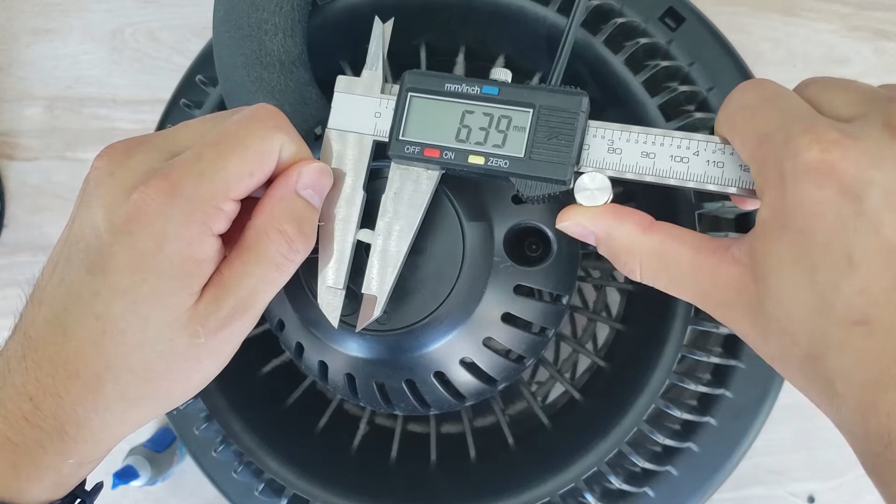So I took some dimensions with my trusty calipers. This diameter was about 6.5. And then there's this little flat cutout section that was about 4, and that's how it actually turns. Now this wobbles quite a bit, so it's a little unreliable, so I just took the best dimensions I could, and it turned out to be about 14 millimeters in length. I rounded up.

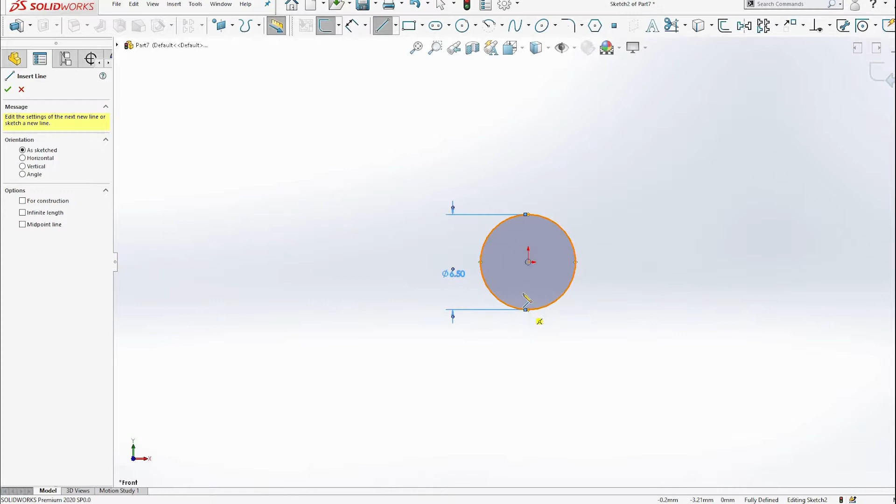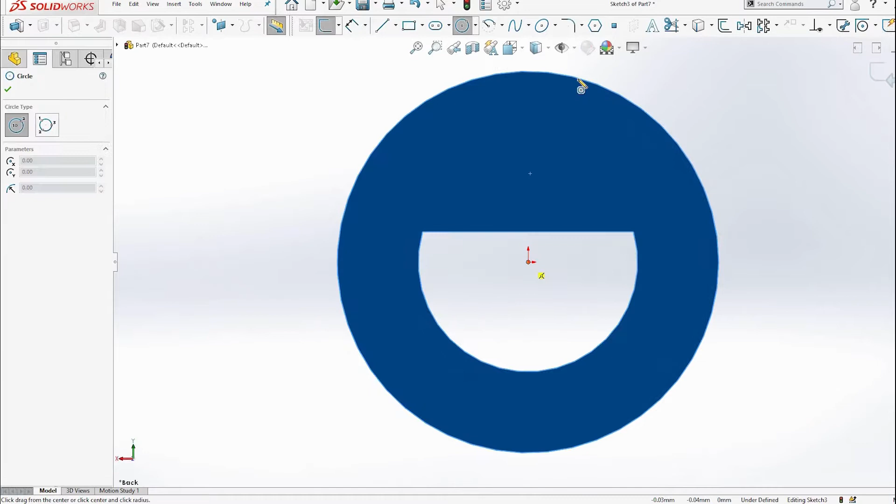Alright, so first I kind of remodeled the peg thing based on those dimensions. Then I did a little bit of an offset just so it wouldn't be too tight of a fit. And then I added a circle just around it. I set it to like 12 millimeters, that's pretty good, and extruded it to 14. So that was the length. I added a little bit more on the back end just so there'd be more to grab onto. And then from there I just slowly started building up from it.

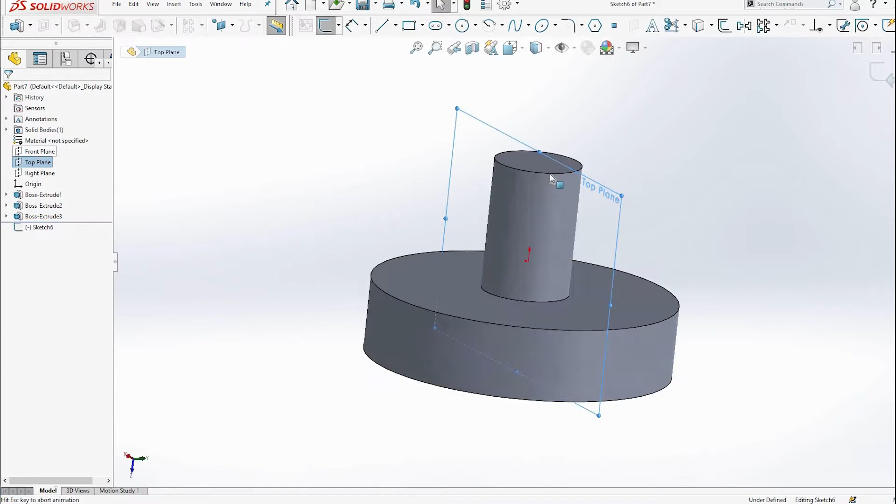Once I had the basic shape down, I wanted to add kind of a rounded top to it. So I was playing around with some heights, trying to figure out what the best depth was. And I was running into a little bit of an issue because it wasn't quite lining up. So I was trying to make it tangent with that side line and that top line.

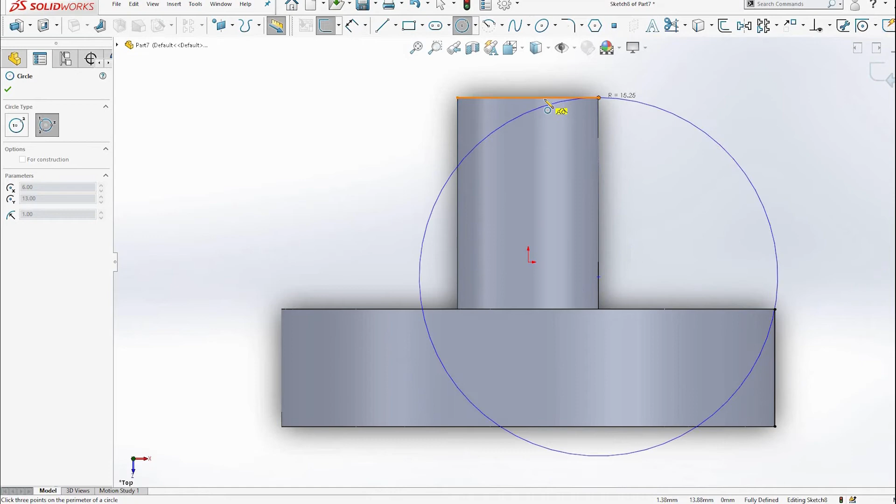In the end, it was giving me more trouble than it was worth, so I decided to cheat a little bit and cut off just a tiny section right there. Now it's nice and round and seemed to be perfectly fitting. Once I was happy with the shape, I decided to revolve it around the center. Now it has a nice dome to it.

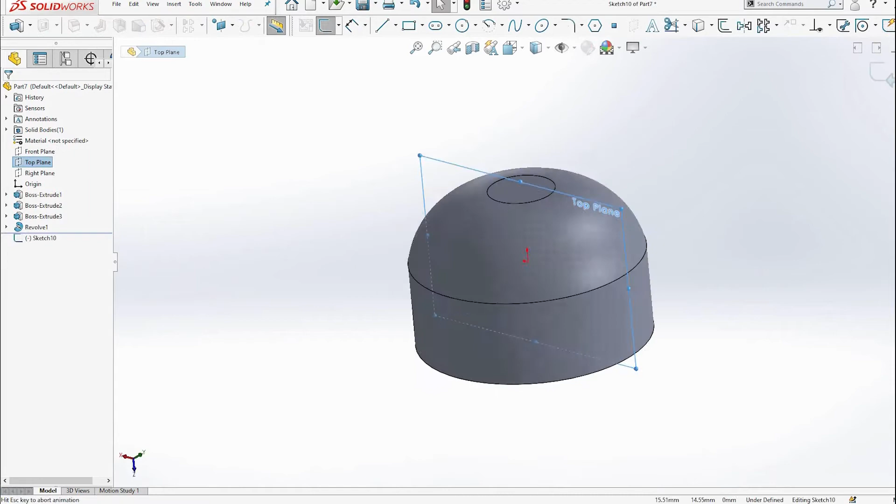It was looking pretty good, but domes are kind of hard to grab onto, so I decided to try and cut into it a little bit. I was being a little creative with this, just trying to see what was most ergonomic, and effectively what I did was I outlined the sides, and then I do a little cutaway, something called a swept cut. And so what that does is it traces a circle around that line and cuts it out.

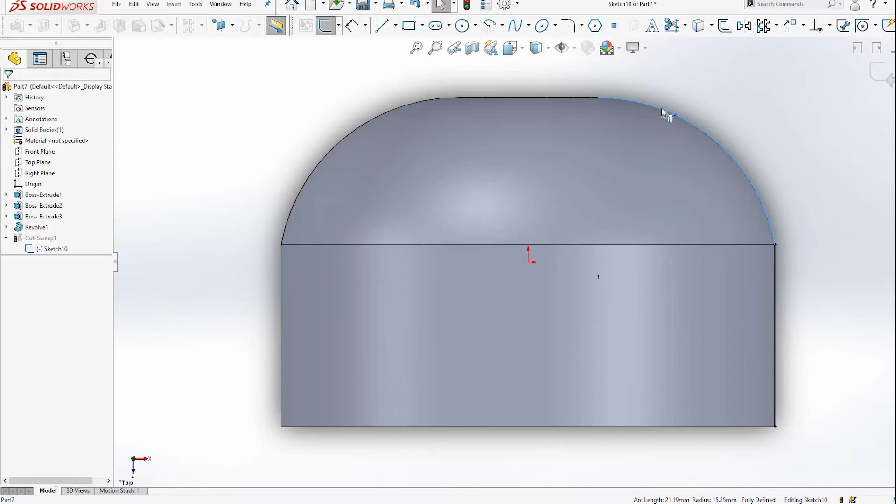Now this doesn't look very ergonomic right now, so I extended it up a little bit higher, changed the diameter so it was a little smaller, and from there we can work with it. Now this top section was flat, which I wasn't a fan of, so there's a couple different ways you can round it out. I decided to just do another revolve cut and just cut out a sphere. This bottom section doesn't really matter because it's going to be flat against the fan, so that looked pretty good to me at first.

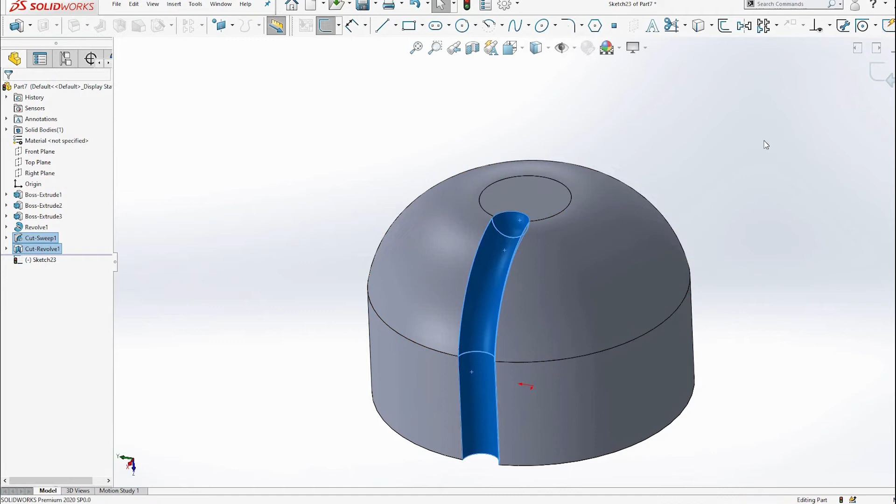So I decided to kind of replicate it in a circular pattern, give it some grooves, and then round it out. But I ended up making something like a Coke bottle or a bell pepper.

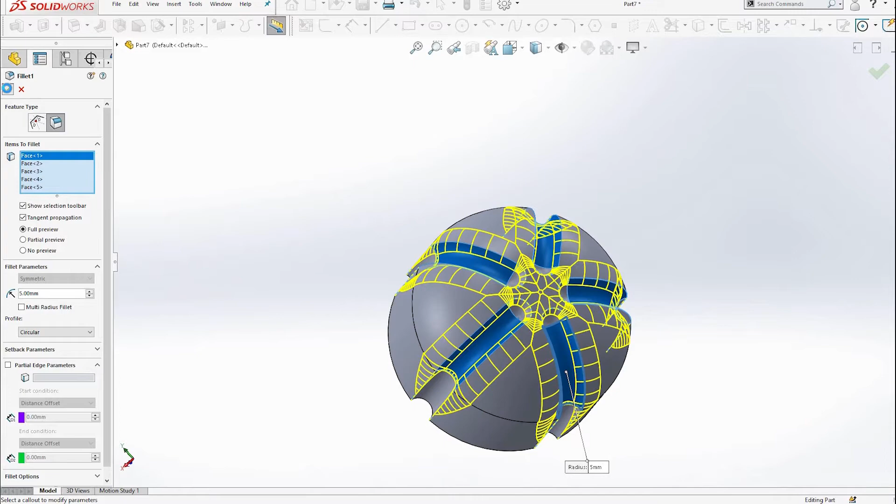I tried rounding it out some more just to see if I could fix it, make it look a little smoother, and I wasn't a huge fan. Still trying to round it out, but again, it just kind of looked like a Coke bottle, which isn't the most difficult to grab onto, but it wasn't exactly the look I was going for.

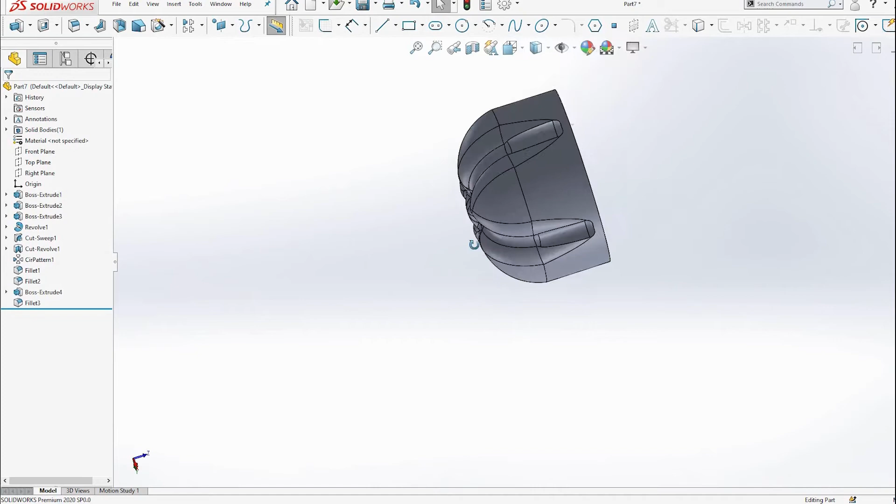I tried adding this base here to see if I could kind of fix it up, make it look less like a weird Coke bottle bell pepper shape. Tried to round this out, and again, I just didn't love it. Wasn't vibing with it, so I decided to delete it all and start over.

Alright, so that last design was something new that I was trying out, didn't really work out. So this is something I've done before many times, and effectively what I'm doing here is I'm cutting out these fins. So first I trace a line.

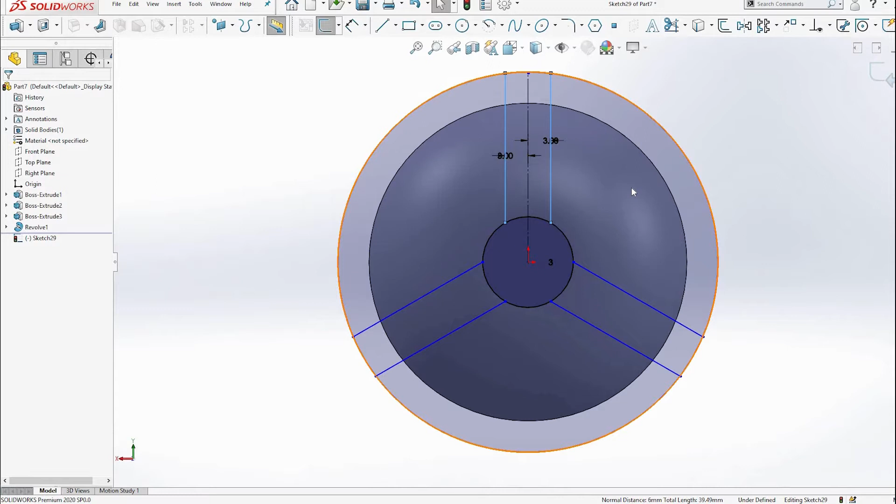Get it to the good length, replicate it in a circular pattern, and now what I'm going to do is effectively trim away all those excess lines. And you'll start to notice these highlighted sections pop up. Those highlighted sections are what is cuttable, so I take those and extrude cut them straight down to this.

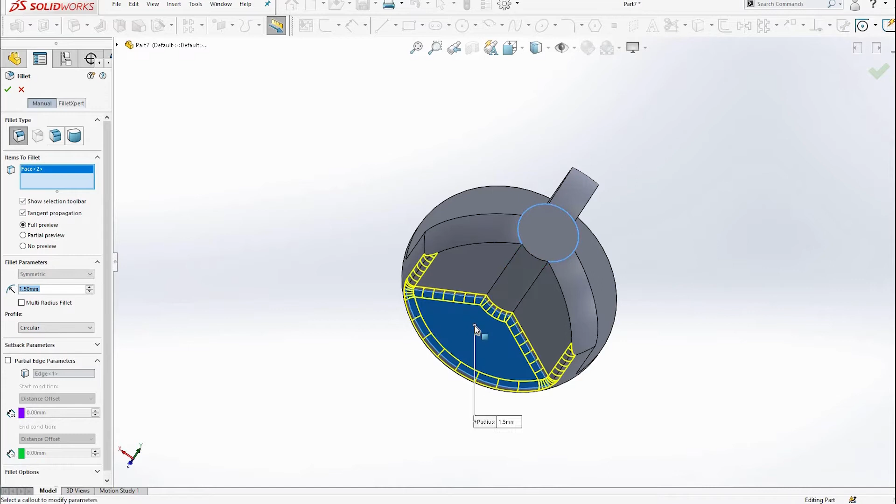So I start rounding these edges out, just to see if it was more ergonomic. Then I realized that's probably a little too far of a cut. I don't want it losing integrity. So I cut it to this line, this vertex right here, and that seemed pretty good.

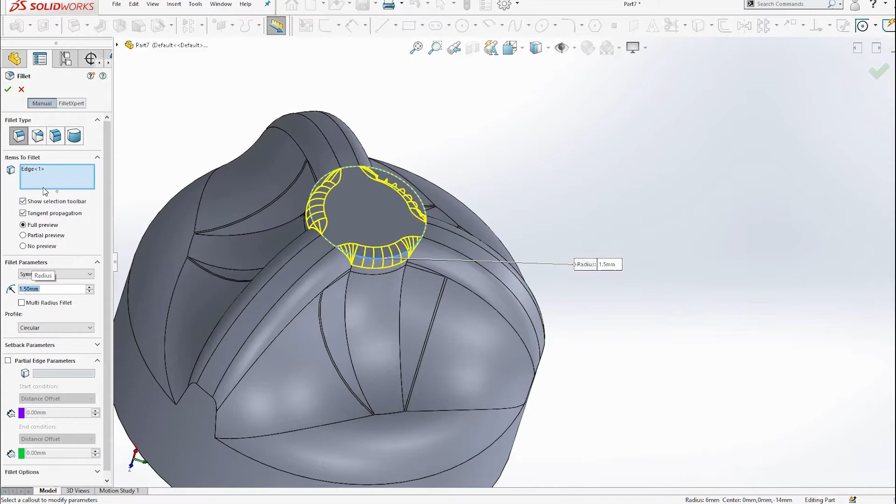From here, I started rounding it out like I was before. From my experience, if you want to make something look really professional, you just fillet it. Basically that just means rounding out those edges. Makes it nice and smooth looking, nice and comfy, nice and ergonomic, and really can't be too curvy. Lastly, just round out this top section, and bada bing bada boom, that looks pretty good to me.

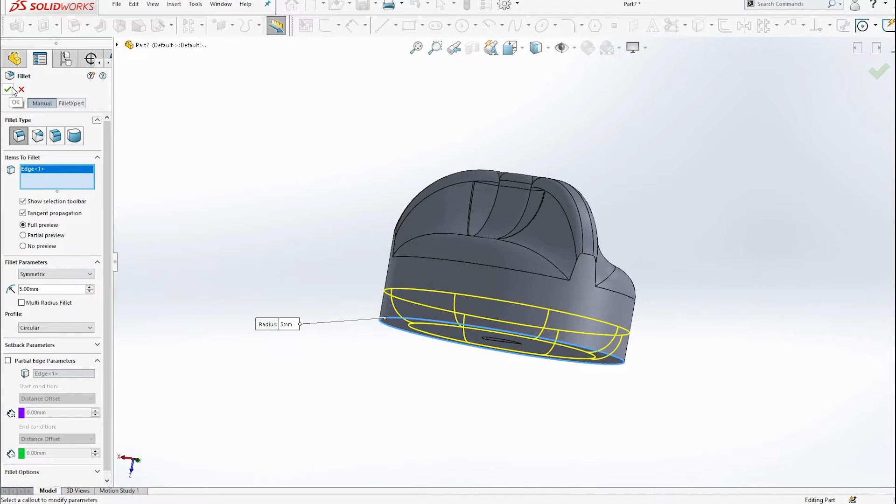So here you might notice that it doesn't move for like a couple seconds, and in real time that's a couple minutes. I was just trying to see if there's anything else I could add to it. So I was looking at the bottom and I realized maybe I could round it out because less surface area and contact means it'll turn smoother. But then I gotta think, okay, I'm 3D printing this, that might make it a little bit more difficult to print, so I decided now it's fine.

So I go ahead and save it, export it, and it's looking pretty good. I think that's nice and functional, pretty ergonomic.

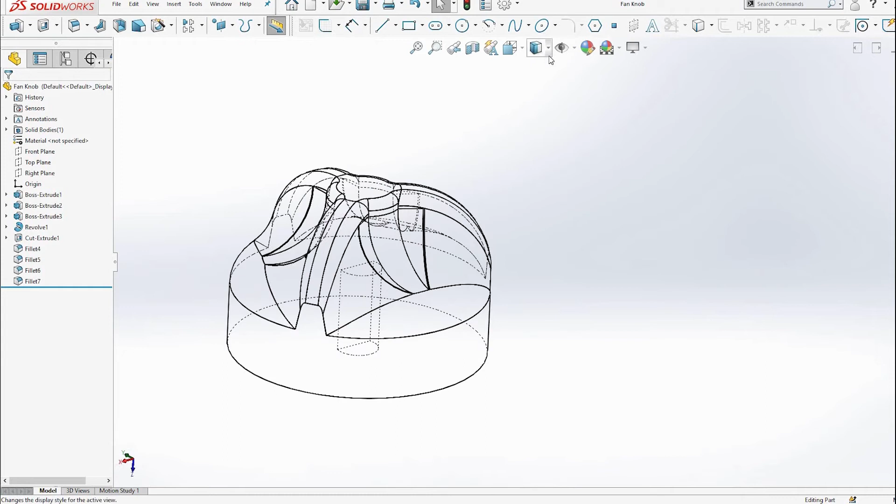And then before sending it off to the printer, I just wanted to double check, make sure that internal section had enough material around it so it wouldn't crack after prolonged use. Looks pretty good. And then just to verify, I do a cutout section just to again see if there's enough material around it. And there seems to be plenty, so I think this will last a pretty good time.

From there, I save it again, and then I save it as an STL to export to my slicing software, basically the 3D printing software.

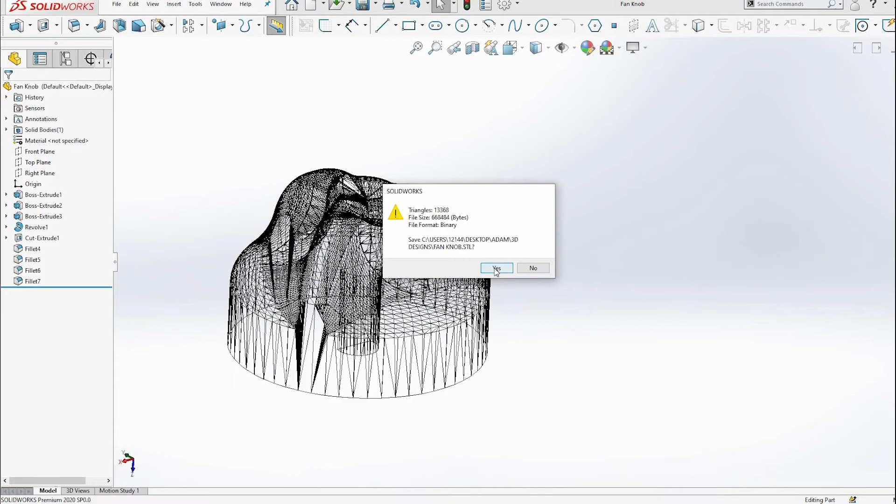I like to use Prusa Slicer just because I've got a Prusa printer and it does really, really well. So I import it, turn it around so it's nice and flat on the bed, take a look at it, and then I looked through a couple of the settings because the print I had done prior to this one required some kind of specifics.

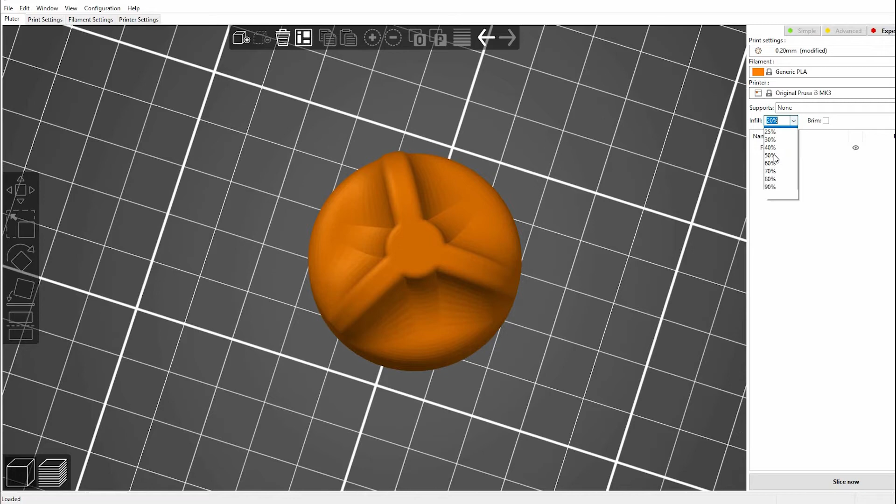So I just wanted to double check all my settings, basically just checking how dense it is, how many layers it has, both in the X and the Y, how many loops, any support material. If you're more interested in this, leave a comment and I'd love to go over more in detail with it.

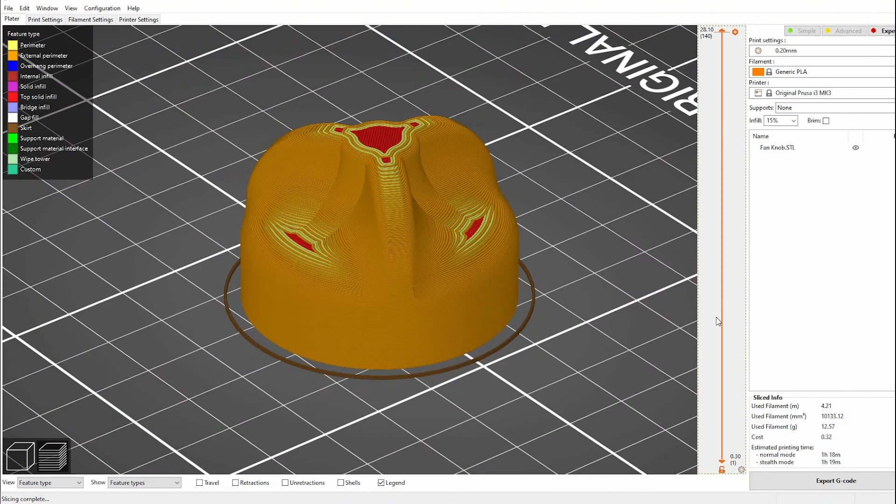But I slice it, it looks pretty good, layer looks pretty good, and I think we're good to print. Just taking a look at the infill here. Perfect. Exporting it, and off to the printer we go.

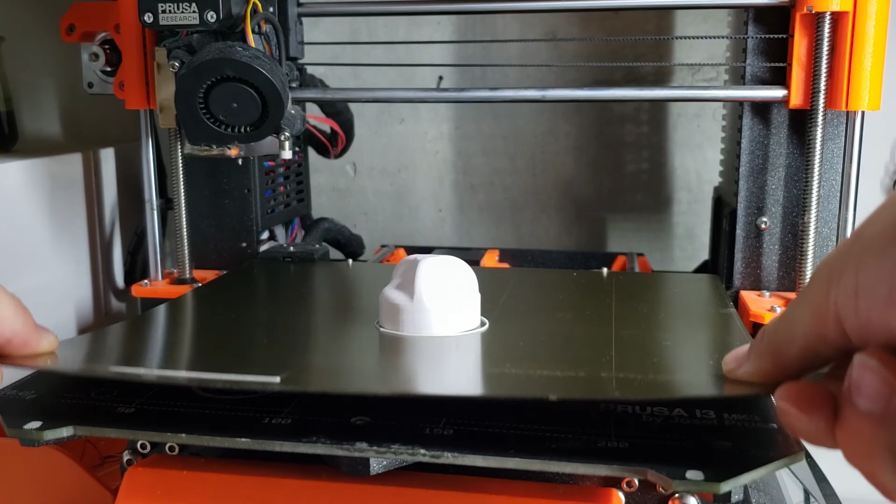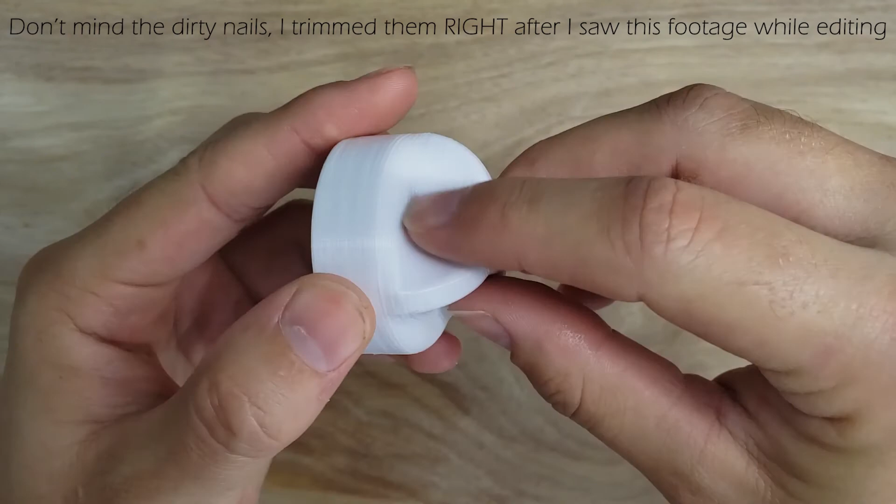So the print turned out perfectly. I printed at 0.2 millimeters and nice layer adhesion. Took about an hour and 15 minutes and I was super happy with it.

No cleanup needed. Alright, so normally I would like to pressure fit, but because that chassis was broken, pushing on it was kind of difficult. So I decided to make the tolerance a little bit looser and then just super glue it on.

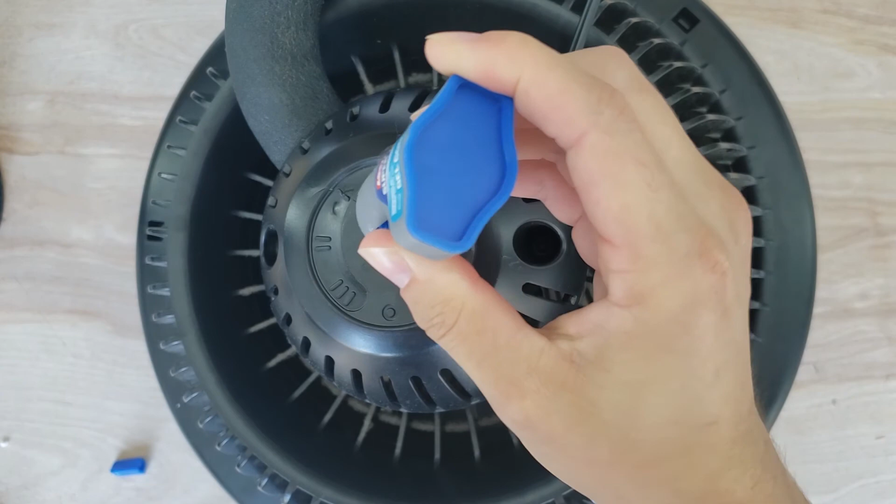Now, I didn't have any black filament to match the color of the fan, but it kind of doesn't matter because it's going to be behind it anyway. No one's ever going to really see it.

Alright, everything's glued in place. Time to give it a test. Perfect.